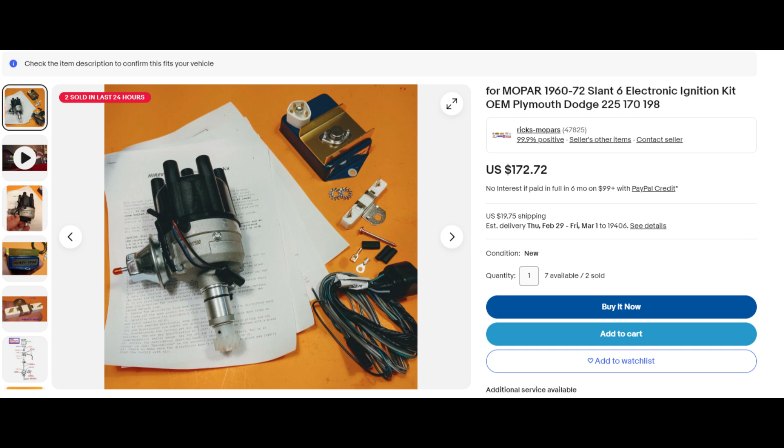On this episode of the J. Reagan channel we will discuss and install this eBay special electronic ignition kit. This was a pretty cheap and easy install. The only issue was my lack of following the directions. This is not an HEI setup. Let's see how I made out.

How do you like my AI voice?

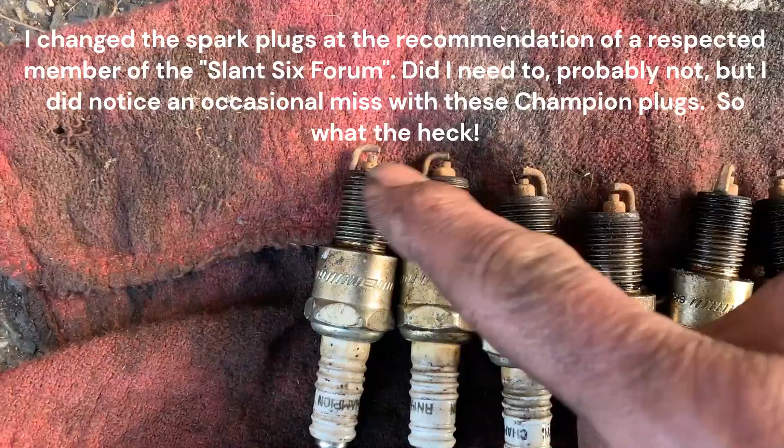Okay, so I did go out and switch out the spark plugs, just because I'm going to go to the electronic ignition and I want a different plug, but I'm looking at the plugs that came out of it and they look really nice. So I'm glad that at least looks good.

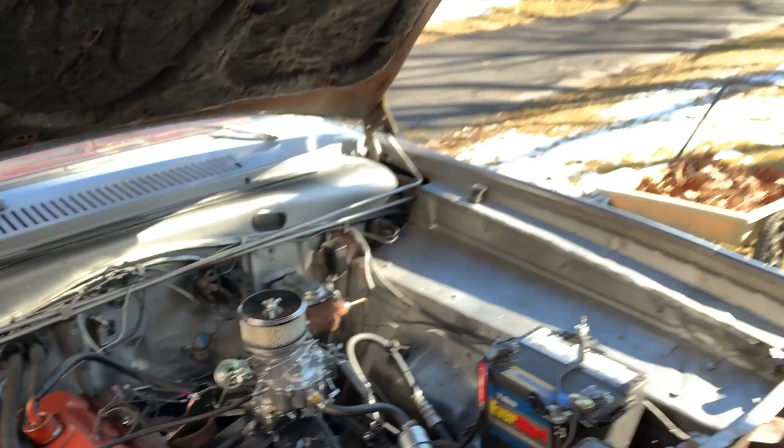Let's give it a test drive with the NGKs, see if it does any difference. They're down there, you can see them in the trash can. See if that makes any sort of difference. Probably won't. I didn't do it for performance. I did it more for once I moved to the electronic ignition. It was suggested that you run this type of plug.

Here's the test drive with the NGK plugs for what it's worth. Shift points are real good now. I did back off that cable a little bit. Still no kickdown. Plugs make any difference? Nah, I can't tell a difference, although they're not missing.

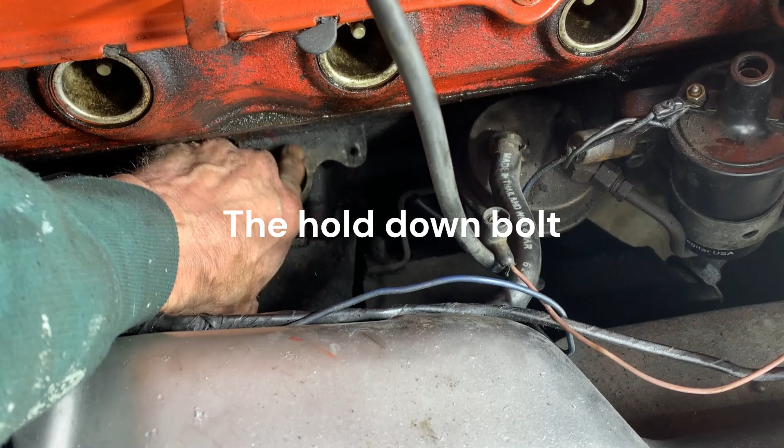I don't know if I'm going to get finished this, but I do have the old distributor out. I found a kind of interesting thing here, that this bolt for the distributor was really loose. I guess I never tightened it up one time when I adjusted the timing, so I'm sure that didn't help out the engine too much, running wise.

Here's the old distributor, which really isn't that old. I purchased this because the car did not have a distributor when I bought it. I have to take this bottom plate off and put that on the new distributor, and we'll drop that in.

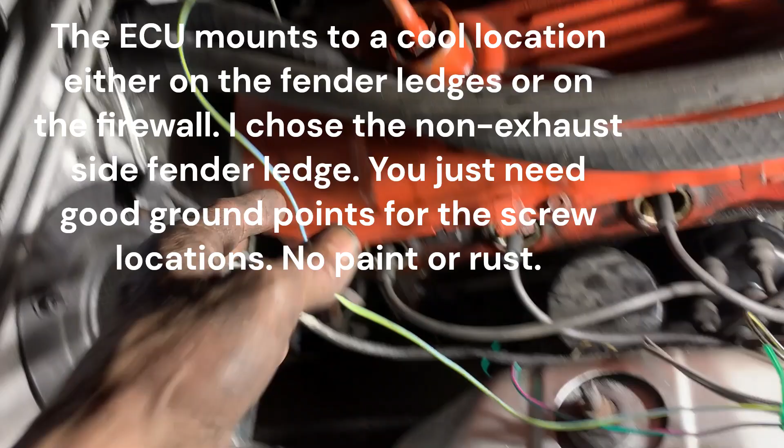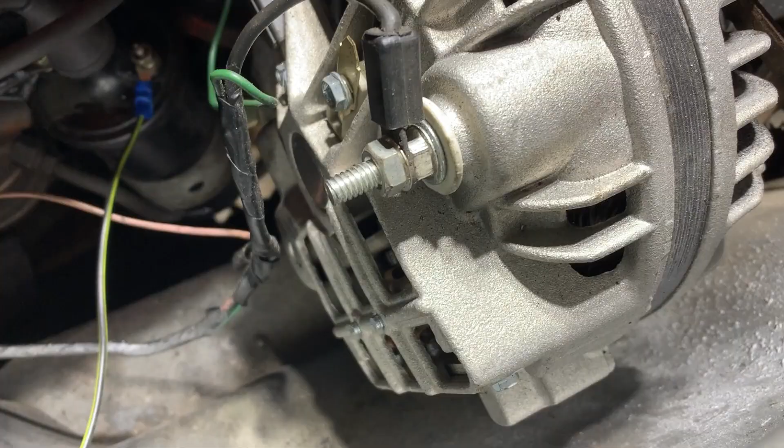Okay, you got the ECU mounted. Got what I think is the correct wiring. Got the new distributor in. Hopefully this is somewhat close. What do you think? Do you think it'll fire off the first time? All right, start. I think the timing's a little off. Let's fix that a little. Let's go from one extreme to the other. Probably have to settle somewhere in the middle.

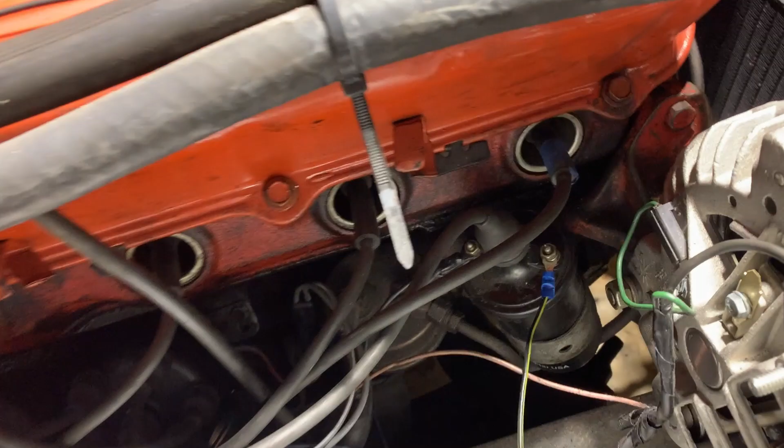All right, let's try the other direction. I'm obviously going to have to do some finagling with this. It's total other direction. All right. Somewhere in the middle. Yeah, that's the middle. I get the feeling I may have to do something with the bottom plate of the distributor. I have it set in the middle, but when I took it off, it was sort of to one end.

There, something's not quite right. Let's see if we can figure this out. Could also be this choke. Since that was new, it is wide open. I closed the choke plate on it. Shouldn't be that cold though, but we'll see.

This is one of those things where you do too much in one day, and perhaps that is the root of your issues. I don't know why I did that. I know why I did that, because a lot of people say I mumble, and I do. I forgot to put the battery cable back on. Doofus. I ain't a doofus.

Well, it has something to do with the choke. The choke stay open. Let's try it with the choke open. I don't think I have this choke tuned in yet either. Alright, definitely got too much timing. Well, let's play around with that.

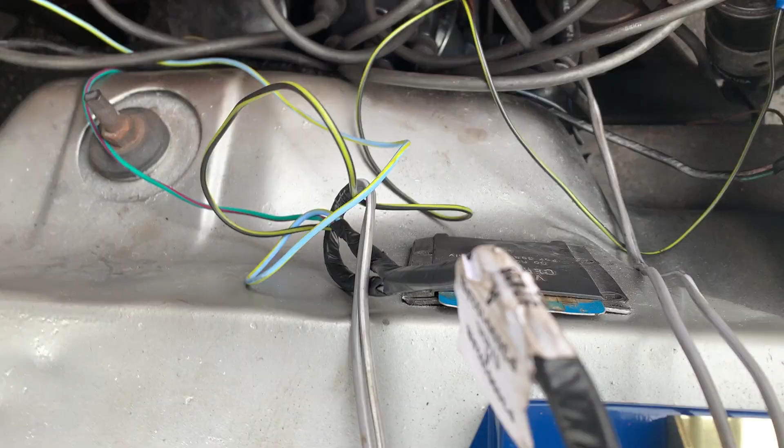Where's it at now? Alright, so can you see down there? It's a little hard to see. I really can't adjust the distributor. It wants to go more advanced, I believe. And I can't do that because the bracket is hitting the block. So I think I have to kind of pull this out again. And of course now it's 1,000 degrees. And loosen that bolt. I think that bolt on the underside needs to go to the extreme the other way. So we're gonna mess around with that.

Jay is a total doofus. This is what happens when you forget to bring the directions. A couple of days later and we'll give this another shot with the directions.

Took the distributor out, and we're going to take out the spark plug and find top dead center. Here's the new electronic distributor.

The thing that always kind of gets me confused on these is this back bolt. I know when I had this on there, I had it to one side, and I'm gonna have to check the video to see where it was, because that will determine how much movement you have.

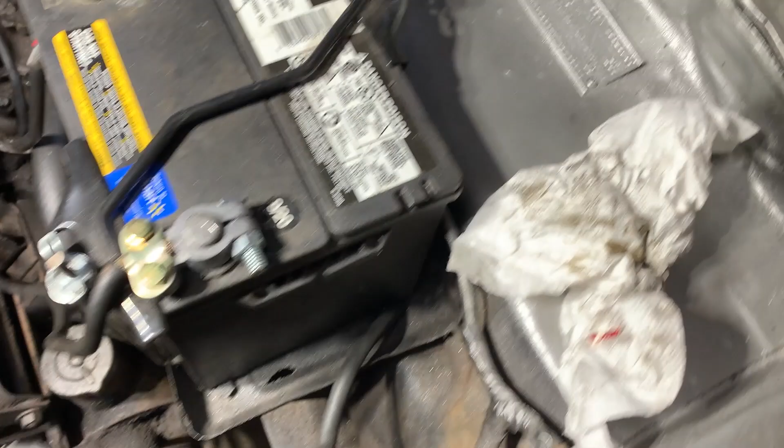Okay, so here's how I do this, and other people do it as well. Number one spark plug is out. See it? Also, you want to make sure that the car doesn't start when you do this. This car can't start because it has no distributor, no coil, or anything like that. So what I'm going to do is connect the battery. I go in the car and turn the ignition on, which the keys are all the way over here.

Rainy day. Where are my keys? Here they are. Ooh, my coffee. Drink that. Let's see if my Yeti keeps it warm enough. Not bad. Put that there.

Let's turn the ignition on. Where are you, trapezoid key? Got it, you're in there. Ignition is on. And trying to put you in a spot where you might be able to see.

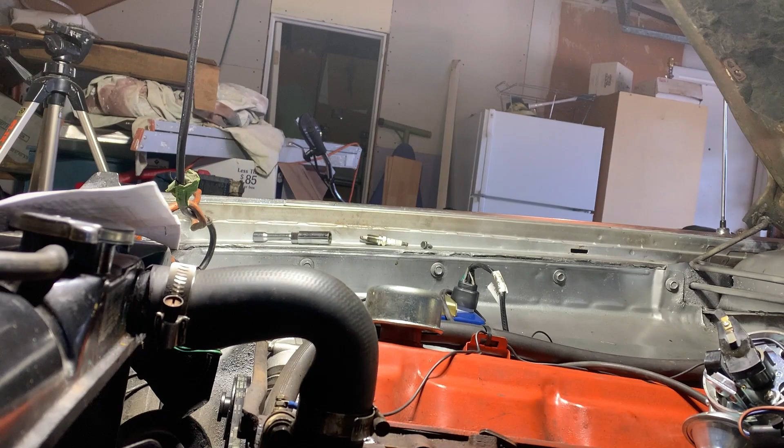So what I'm going to try to do is feel the compression on my finger. You want to set this for top dead center on the compression stroke, because there's two strokes where the number one piston will be at the top of its travel: on the compression stroke and also on the exhaust stroke. You want to get it on the compression stroke.

So we're gonna, without getting any fingers caught, I'm gonna stick my finger in the spark plug tube. Then I'm gonna kick over the engine. And then I'm gonna feel the pressure of the piston come up, the compression of it. Right there, I feel it. Did you hear it too? All right, that's the piston coming up.

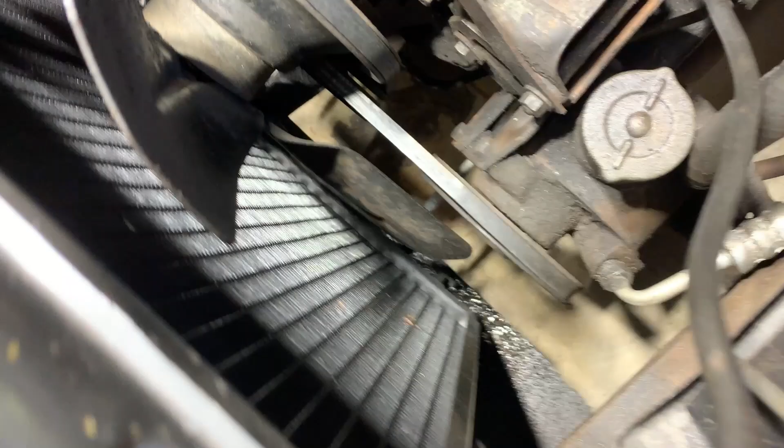Now what I do is, might be hard to see down here, but there are timing marks. Let me put a light on. Now for this next step, I will turn the ignition off. We don't need that anymore. We have the piston coming up on the compression stroke. Can you see down there? A little hard to see.

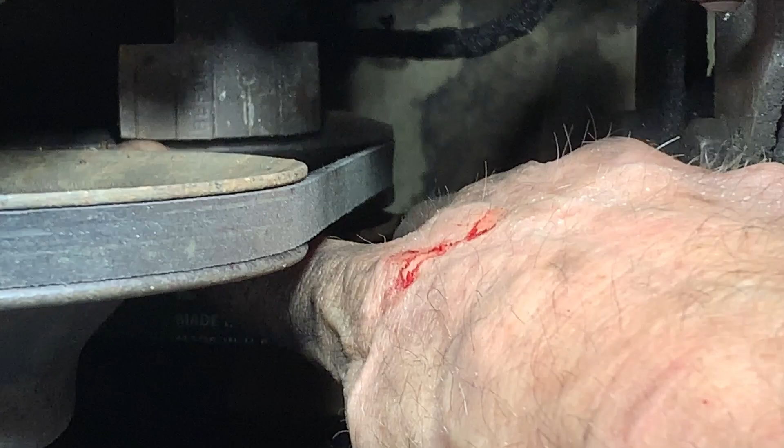That there is a tab near the, what do you call that thing? The pulley here. And you can see right there. See it right here? Of course you can't. My finger's in the way. There it is. This here. And it's hard to read, but that's 0 in the middle, and then it has the before, so before top dead center and then after top dead center.

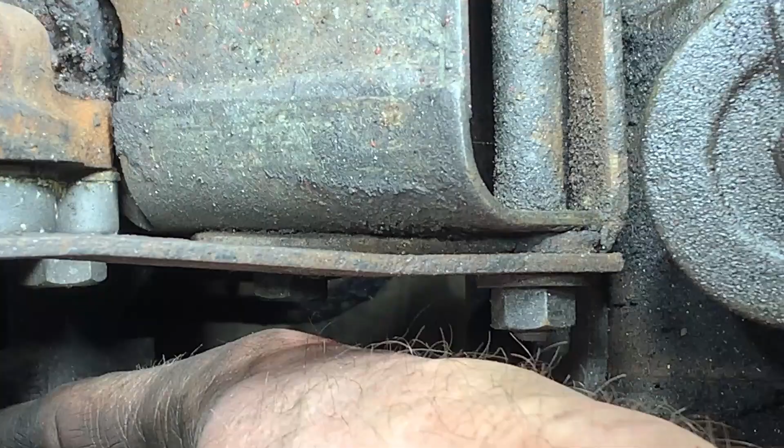So I'm going to set this on 0 first. But sometimes you can't go by these marks. There's a mark on the damper. That's what this is called. It's just about here. You can't see it yet. It's about to come up, but you'll see that in a second. Hold on. I'm using the fan to turn the engine. So there it is on 0.

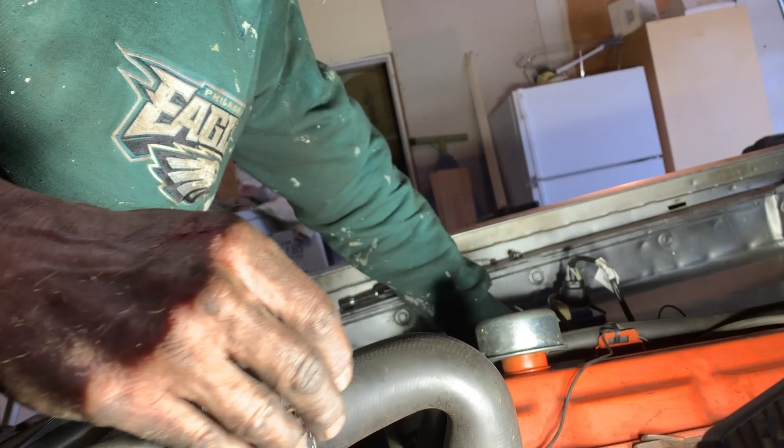Take my skewer out. Now the directions say to rotate the crankshaft until the engine is approximately 5 to 10 degrees before top dead center on stroke 1. Okay, so I'm on 0 right now. It says to go 10 before top dead center, which is to the left on this marker. And I wish I could see better.

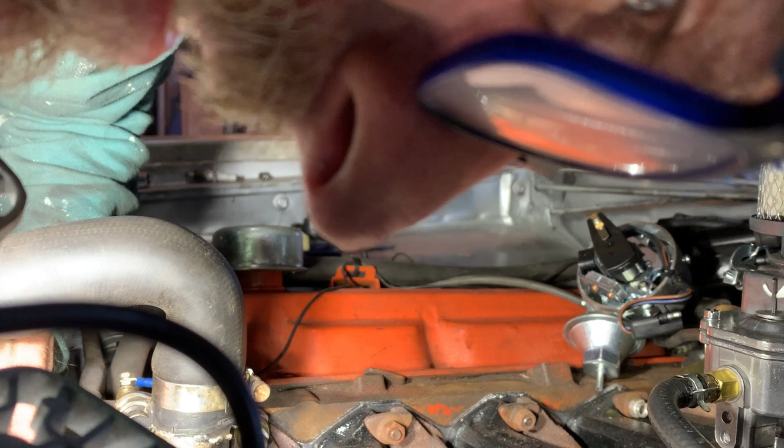All right, so we're on 0 right now, and I am going to move the engine back. I wish I could see that scale. I think that says 5. Yeah, 10 is the second mark. I know you can't see this, so I'm going back. I'm going to go back to 10. All right, so I'm now on the 10 mark. All right. And if you don't believe me, I can show you.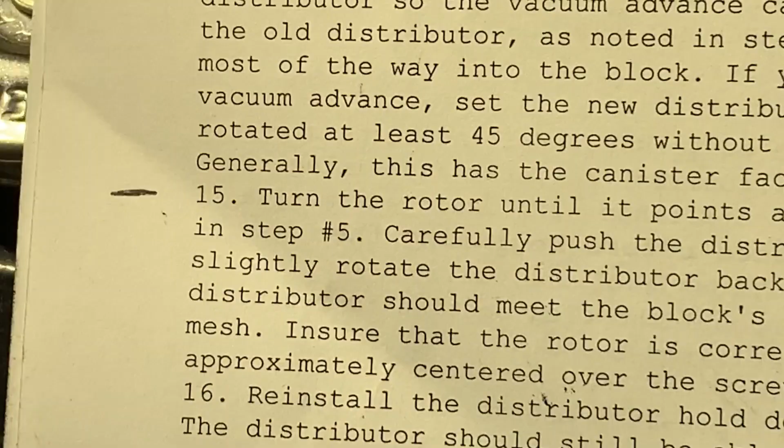Hard to see because you can't see the pulley, but you can kind of see that white spot to the left. And that's on that line that says 10. Do you see it? All right, so that's where we are. Now we want to turn the rotor until it points about 15 degrees counterclockwise of the tape mark you made in step 5. There's a step 5.

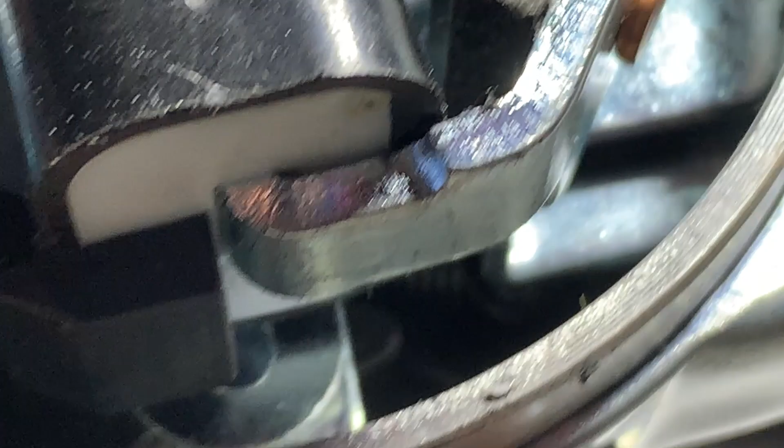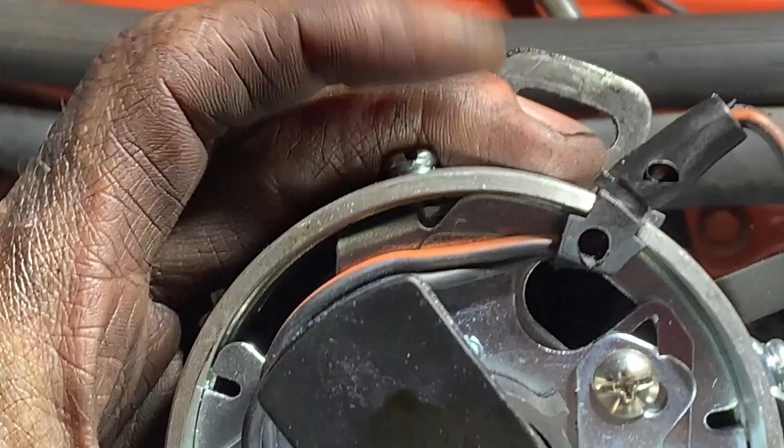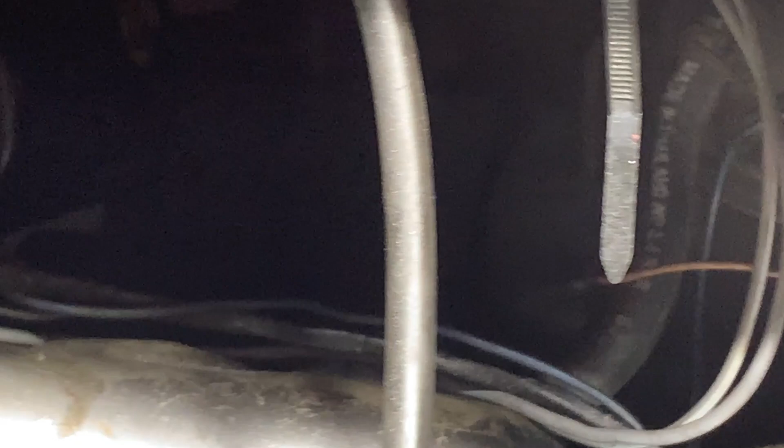That's basically telling you where number one piston is, or number one setting on here. Now, that's basically about 5 o'clock. Okay, 12 o'clock up here, 6 o'clock down here. You want this to be pointing roughly around 5 o'clock on here. And that lines up with the distributor.

The mark on the distributor, see that little notch? That matches up to the notch on the distributor. And a lot of these caps will tell you what is one. But it's going to be the one closest to that notch, so which is right here. Oh, there it is. You can't see. There's a 1 right up there, or a line at least.

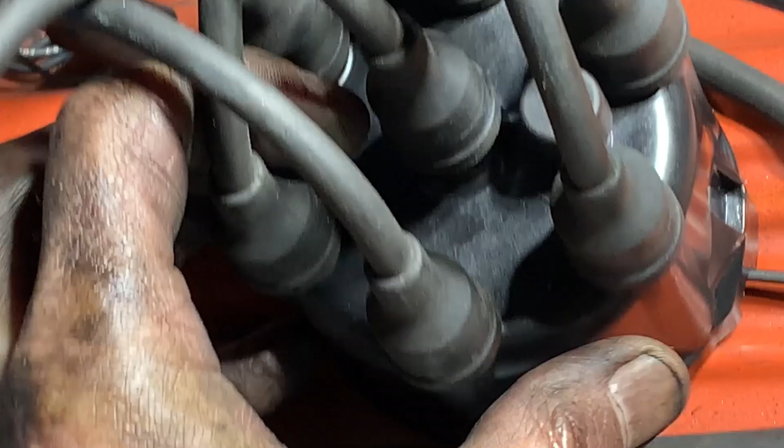All right, so that's where that should be pointing, and that kind of goes to the same thing. It's roughly, here's the cap, that's 12 o'clock, here's 1, and it's roughly like 5 o'clock. So that's how you kind of want your distributor pointing. All right, I'm going to try to get you guys in here.

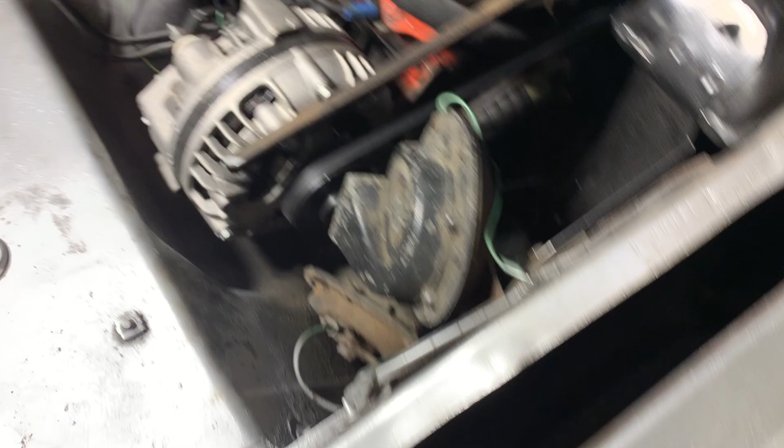Okay, I got everything back together, and let's give this a try. What do you think? Is it going to kick off the first attempt? What do you know about that? All right, that worked for me. Woo! I swear I didn't do anything. Let's see, twisting this thing. Got a little warm up. And I'll probably take it for a test ride, I guess. I did not expect that to happen. But I guess when you follow the directions, that's what they're for.

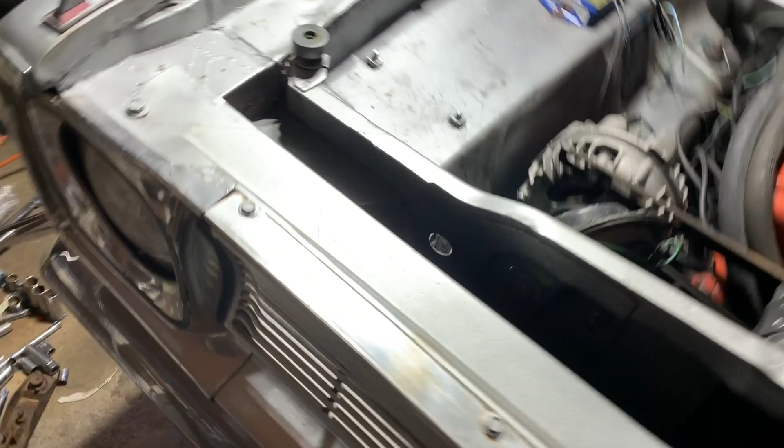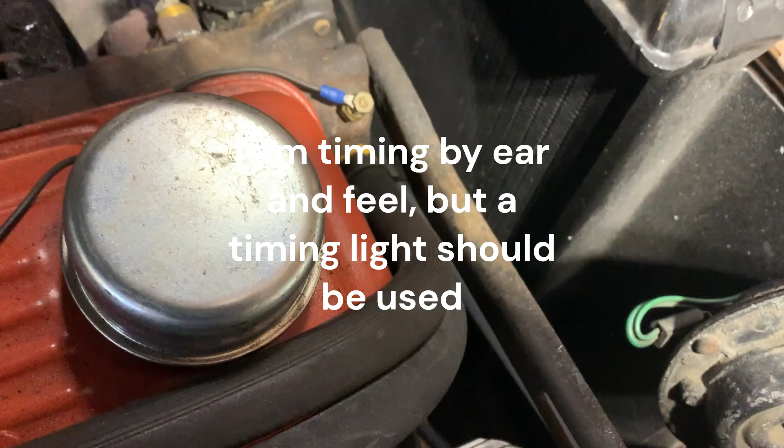It's definitely bogging down. So, too much timing? I don't know. I lost some video here of the test drive. No, say it isn't so. But anyway, the car ran fine but bogged down under load. That's not what we're looking for.

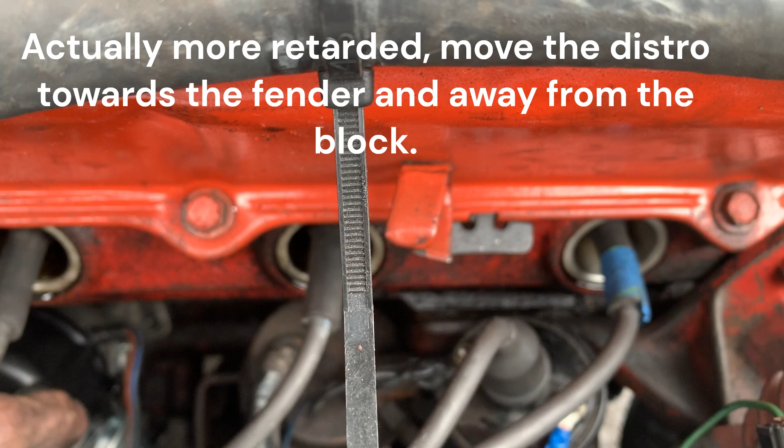All right, so can you see down there? It's a little hard to see. I really can't adjust the distributor. It wants to go more retarded, I believe. And I can't do that because the bracket is hitting the block. So I think I have to kind of pull this out again.

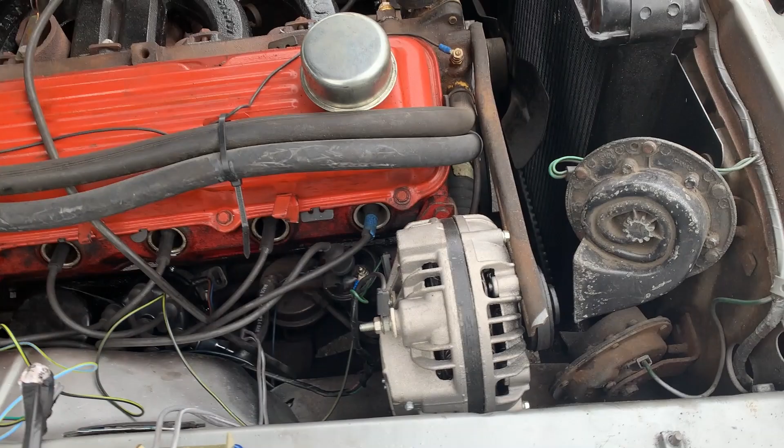And of course now it's 1,000 degrees, and loosen that bolt. I think that bolt on the underside needs to go to the extreme the other way. So we're going to mess around with that because it does not have any oomph when you hit the throttle. Okay, and they have it dialed in now. Still, see how it goes.

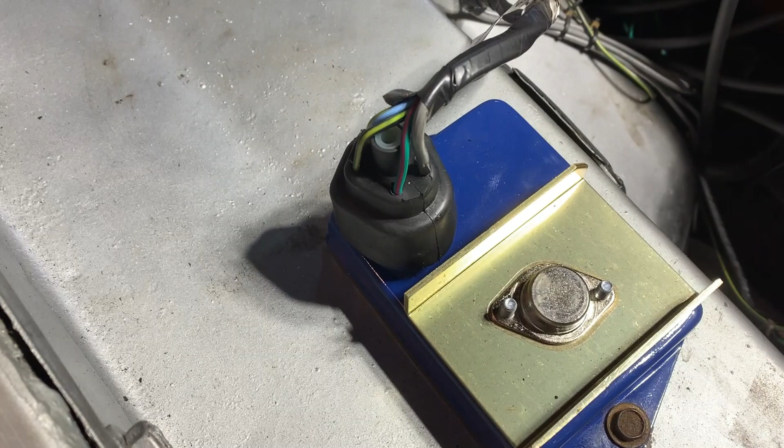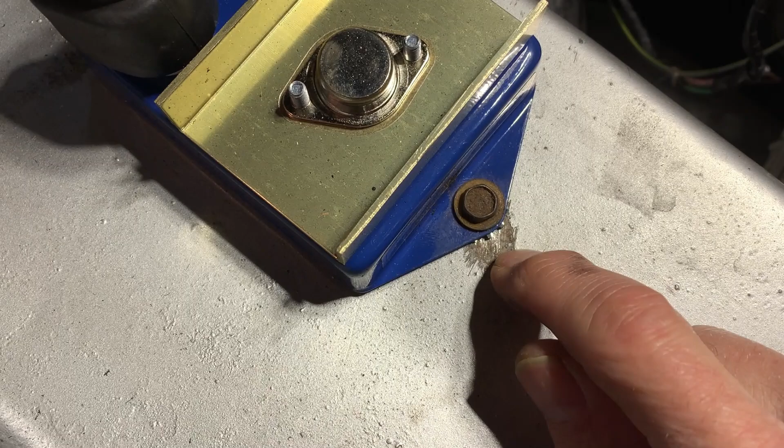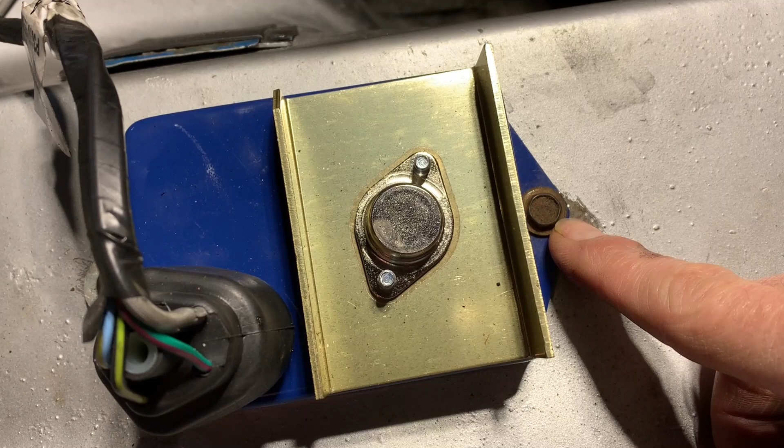All right, I wanted to slow down and explain the electronic distributor system. So what you get in the kit that I bought is this module, fancy high rev 750 model. Anyway, I'll have to patch this up, but what you want is a good ground for the case. So in my case, I just scratch down the metal, and I'll cover that up with some paint, and then just some mounting screws. Of course, I found ones laying around. Probably want to pick up some nice looking ones. Maybe I'll do that at some point.

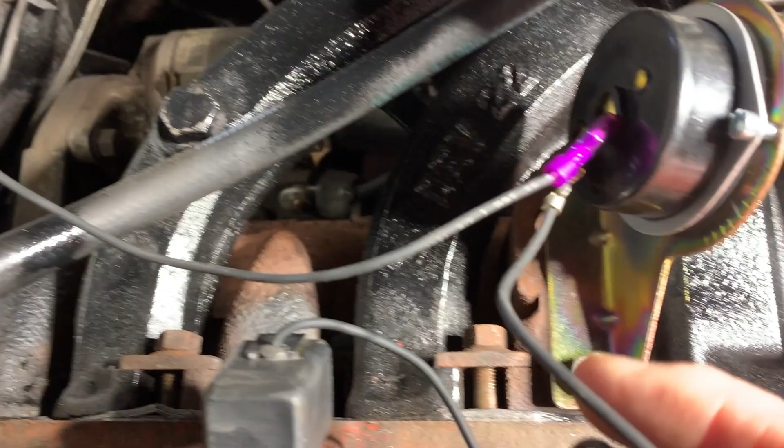Next part is this connector, and I also noticed that there should be a screw that goes in here that holds everything together, but this is just a pressure fit. Put it in there. All the wires are pretty straightforward. You got this blue and yellow wire that goes over to the side of the ballast resistor, and you can see that I kind of did a splice in here. And then this is also the power that goes to the automatic choke as well. Actually, it's this wire right here.

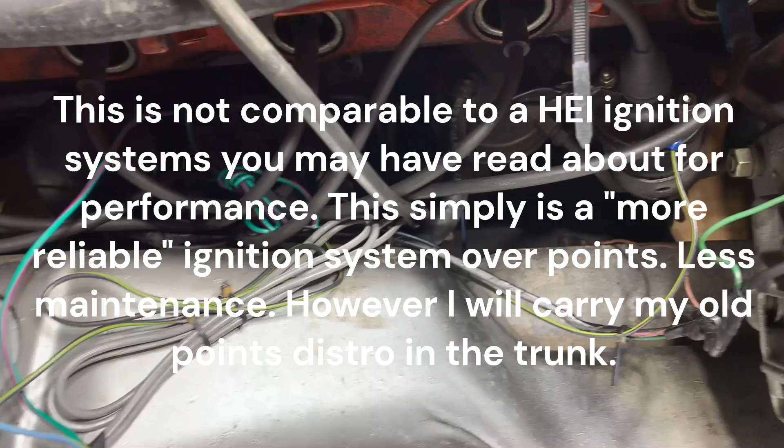Then what else do we have? We have this gray wire here, which I know it's hard to see, but if you go down there, that gets as much light as you want. This goes to the two wires that come off of the new distributor. See that down here? So that's the gray wire. This black and yellow wire right here, that goes to the negative side of the coil right here, and that's about it.

Again, I just spent about 5 minutes looking for my phone, and twice it's been here. So if anybody wants to remind me next time.

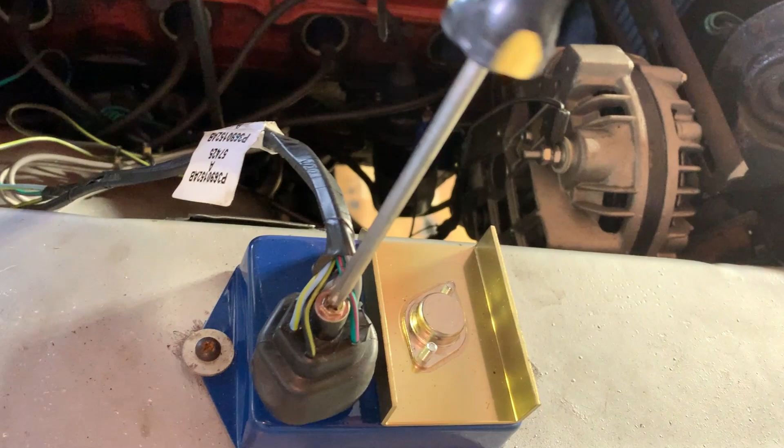Anyway, I did find the screw to hold this connector to the module, and gonna tighten that on. We don't want that thing flying off in the middle of running down the highway, do we?

All right, awesome. So I hope you can hear me as I walk up to the car. We're going to look at the timing, how I have that set. I am no expert by any means, but this is the way that I feel that the car runs the best. They all seem to like to have a little bit more timing, meaning the detonation happens a little sooner than when the piston comes to top dead center. Let's see what I had mine set for.

First thing I want to do is talk about the timing light. This is one of those old-fashioned timing lights. What they call it, inductive. Yeah, right there, inductive. Basically, it just shines a light when the #1 spark plug fires. They have digital ones, which are real nice, but they're really easy to hook up.

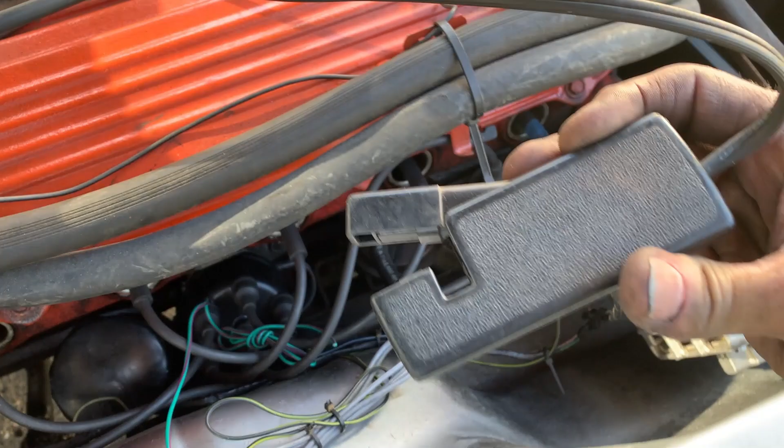Red goes to the positive, black goes to the negative on your battery, and then there's one more connection over here, which is this little clip, which gets put on the #1 spark plug wire, and that senses when current goes through there. All right, can you hear me? Is it good? So let's see what the timing is set for.

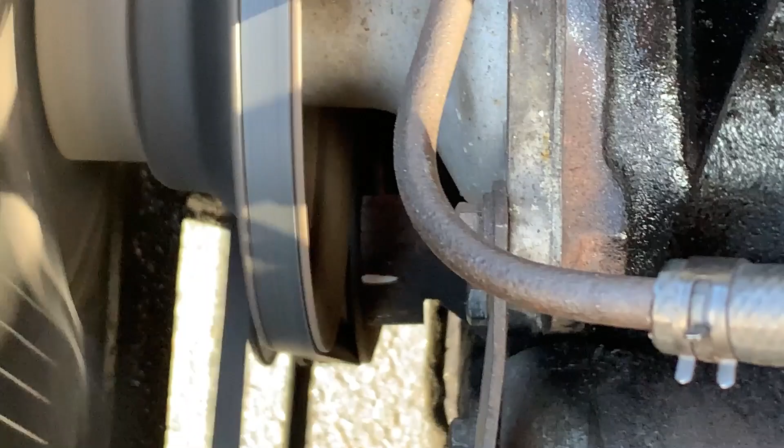I'm going to try to get you guys in there. You see that mark right there? Right in the middle. That's the white mark. That's what we're looking at. And this light, where is it? You see that flashing? That's actually from the light. You see it? And that flashes on that white. It tells you where your timing marks are. Make sure you're cognizant of where the fan is when you do this.

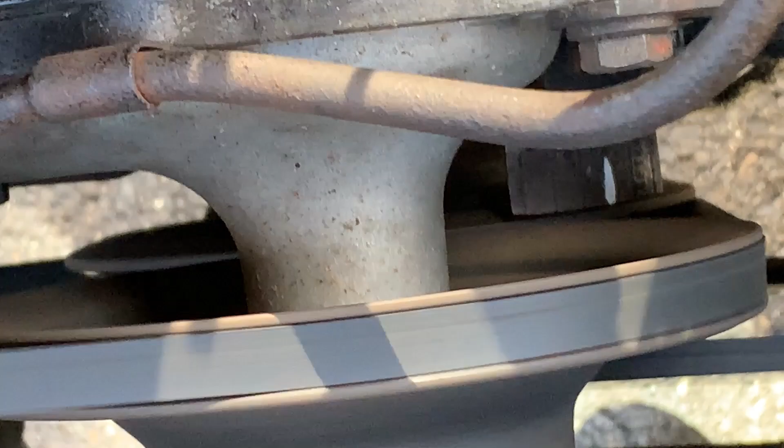All right, let's see if I can see that. Let's see if you can see it. It's kind of hard to see, but the other mark is where that belt is riding. And yeah, it's a little hard for you to see, but I can see that it's right before when you get to that plate. Let me see if we can do it this way. Okay, you can just see it right at the top of where that plate is, to the left. That's where the mark is right now. That's that little flash of white that you see right before. See it? Probably a better shot of it. See, it's like wiggling a little bit.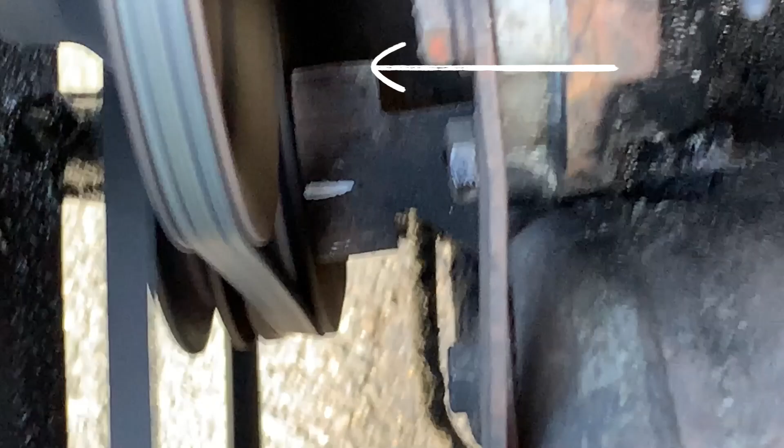Up there in the top, it just blinks every now and then, that little white paint mark. Alright, now when I put the vacuum advance back on, see the screwdriver, that's fine. I know you can't see this, but I'm putting that tube on that pot. So when you do that, the RPM will come up on the engine.

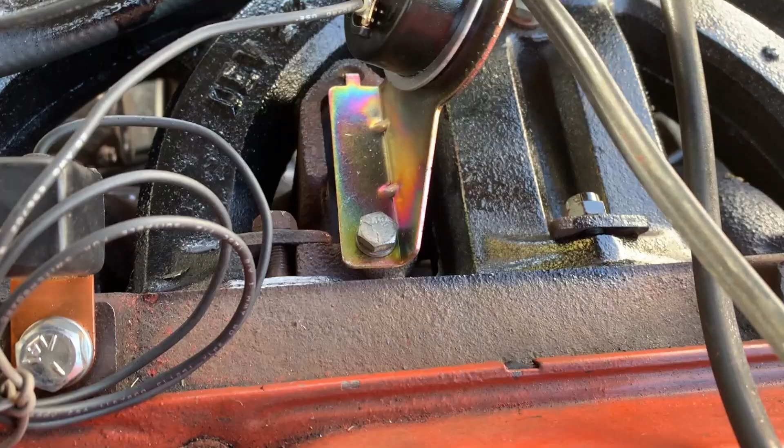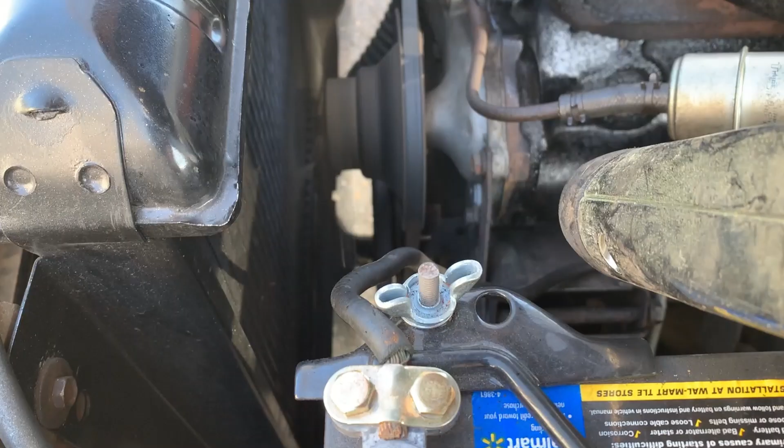And now if you were to look at that, you're not going to be able to see this because it's going to be way back there, but it's about an inch and a half before the top of that plate back there. I know it's hard to see. So that should be pretty good. Alright, it is a little more peppy now.

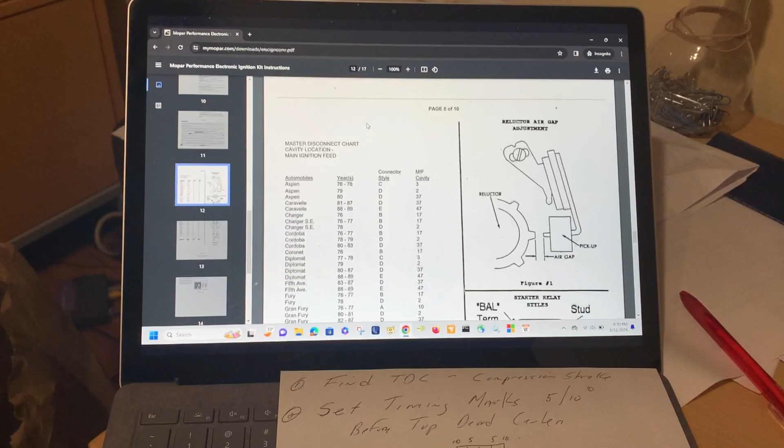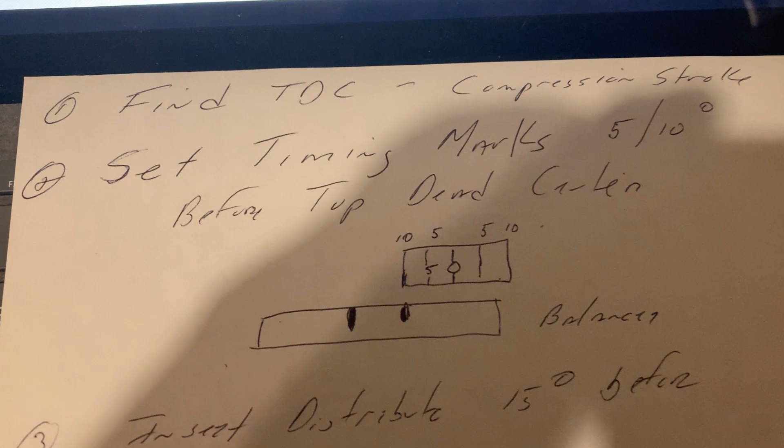It's me again. So I feel like I didn't end this video properly because I didn't really go over a couple of steps, but I can't be more insistent that you look at your own directions when you do this. But let me just go over a couple things. This has to do with initially installing the distributor into the engine. So we talked about this, finding top dead center on the compression stroke.

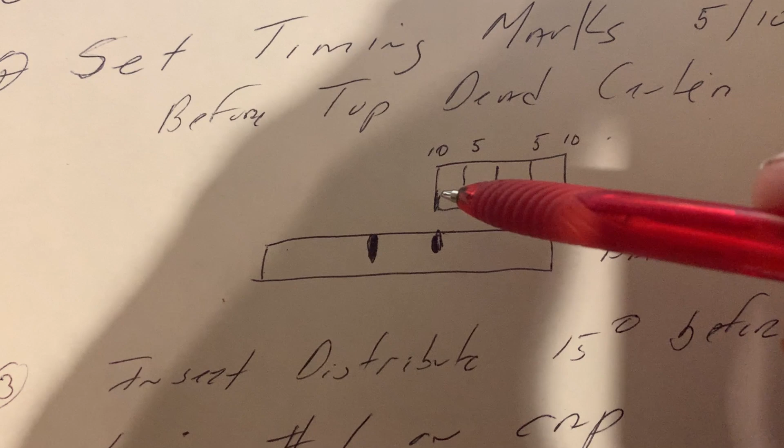Once you do that, at least in my directions, they said to set the timing marks either 5 to 10 degrees before top dead center. So basically, if this is the balancer, ignore this mark. But this mark on the balancer, which you will usually only have one, and then the little tab on the engine: 0 in the middle, 10 and 5 before top dead center, and these are 5 to 10 degrees after top dead center. You want to align this mark with this mark with the engine on top dead center compression stroke, number 1 cylinder.

Then what you want to do is install the distributor, but you can't install the distributor straight down because it has a spiral gear at the bottom. So when you insert it, you have to be about 15 degrees different to where you want to end up, because once the gears engage into the camshaft, it'll naturally twist down. And what you want to try to do is get the number one cylinder at about the 5 o'clock position.

So you've got to envision that this is a clock. This would be 12 o'clock, and 6 o'clock. And so you want that to be aligned at about 5 o'clock. Then, this is with the cap on. You would take the cap off, and I'm sorry for my drawing, but you want the rotor inside the cap to be pointing to that same position, number one cylinder, about 5 o'clock.

And then the other thing that you have to be cognizant of, and this takes some practice to get this in, because sometimes you can be a tooth off on that gear. So sometimes you have to pick this up again and maneuver it back, but you also have to get things aligned. And I got a better picture of this. Let's get on the computer here for a second.

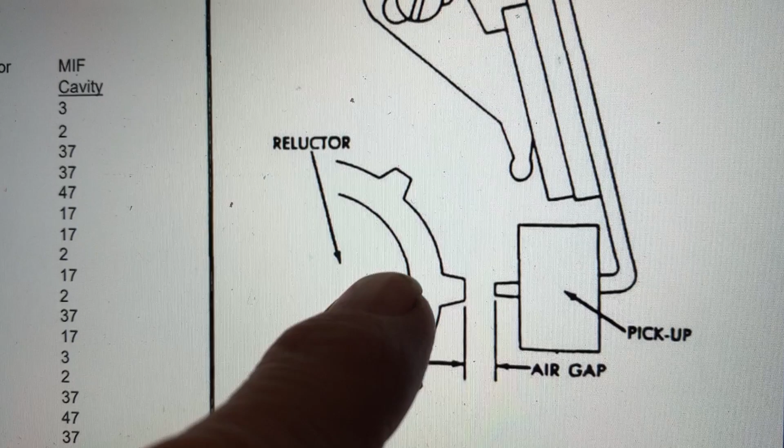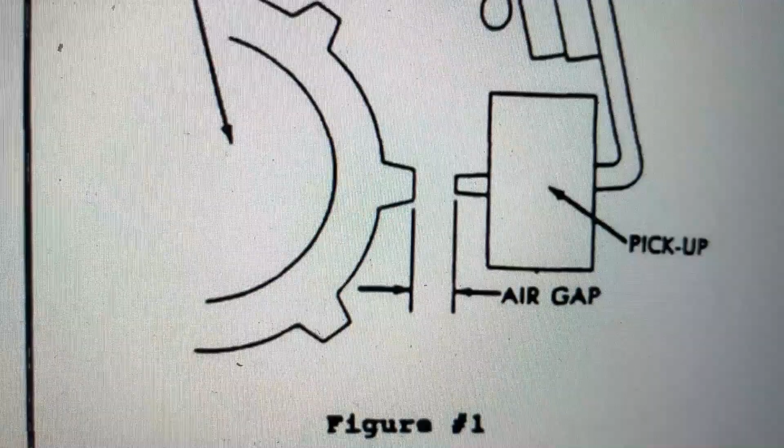So this would be the reluctor. This is the pickup, and this little spot on the pickup and that tooth on the reluctor, doesn't matter which tooth, they have to be aligned. And then there's an air gap between them. On my distributor, they said to set it at 8/1000 of an inch, and you're supposed to use a non-metallic feeler gauge to set that.

So it's sort of a happy marriage of placing the distributor in, twisting it properly to get the rotor pointing at the 5 o'clock position for number one cylinder, and then at the same time getting these two properly set. Once you do that, which took me a good long time to get perfectly straight, you should have no problem getting your base timing set. So I hope that helps.

This is a little chaotic. I'm no expert. This is how I did it, but there's tons of great videos on YouTube that explain this a whole lot better than I could. So refer to them. If you have questions, I'm willing to help.